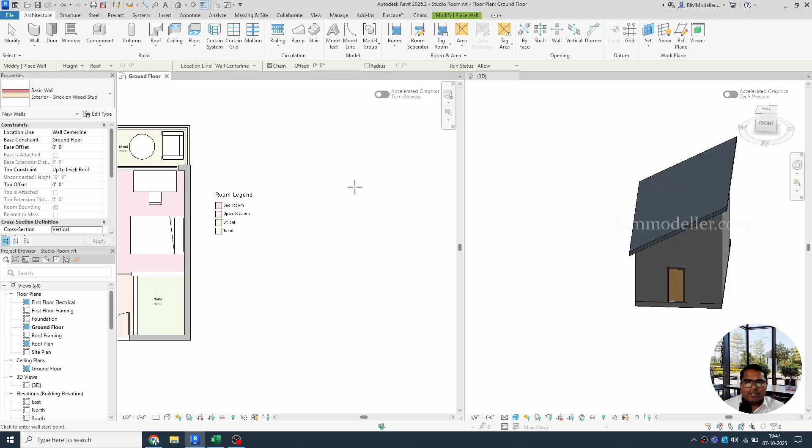So if you're a beginner, if you're using a new version, you must try these options. I'm using Revit 2026, and taking a wall tool, I have taken an exterior basic wall. Everybody knows we can draw this wall, and we can change this to fine and see the wall detail much more in detail.

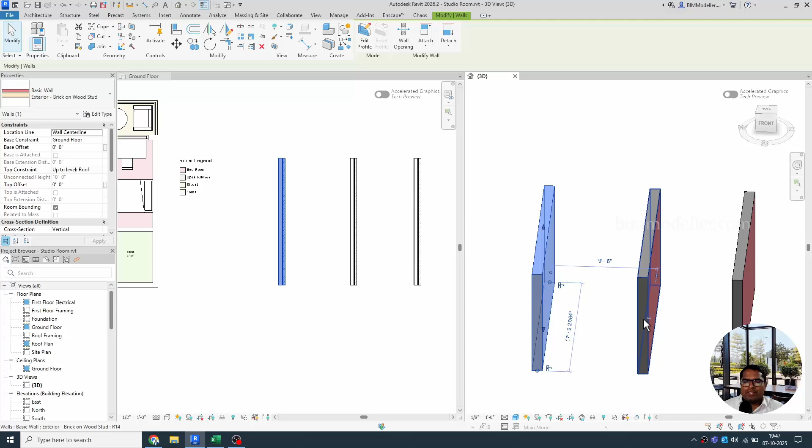So I can copy this multiple times and see what are the three options we have. By default, when you are drawing these, you can see that it's a straight vertical wall. There is a property introduced, cross section, what cross section you needed. It is vertical. The next one I'm going to change is slanted.

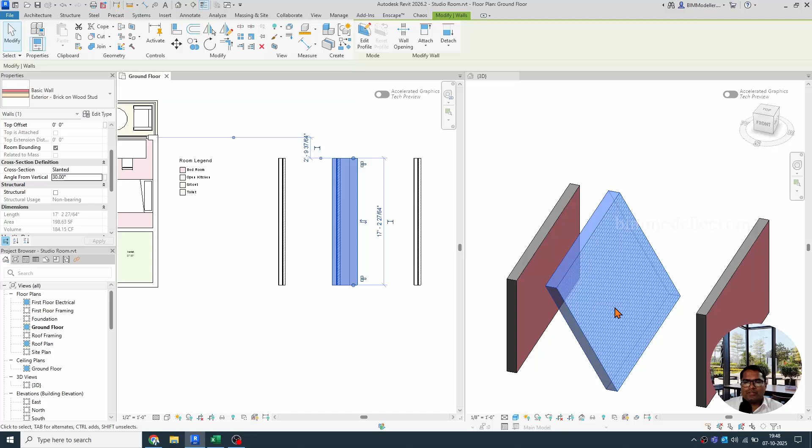You can see that nothing changed, but the property is introduced. We can change the slope property, which is 30 degree, and you can see that the wall is automatically slanted into 30 degree. You can create similar options, right click, create similar, and draw the walls that you needed, any shape that you wanted, and automatically it will be in that shape.

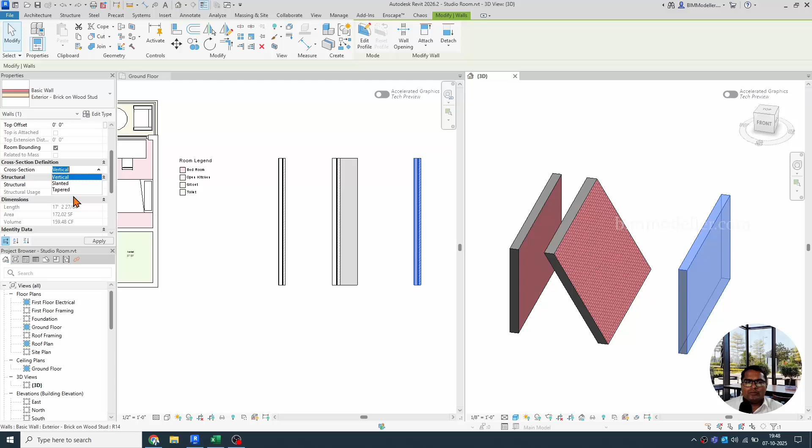Coming back here, when you have another wall, you can have another option which is very interesting, tapered. You can see this error which says the wall type is not compatible because it is not defined in their type. We can duplicate and do it, or go to the edit type of the wall type that we have, and you can see cross section I have already enabled to see what is happening in this place.

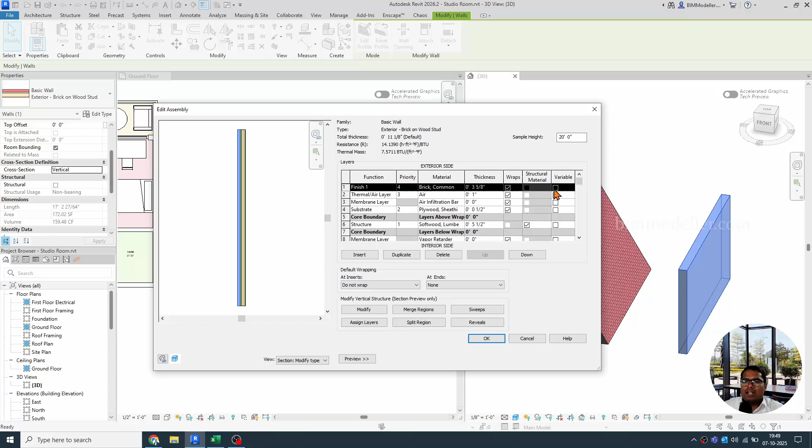The thing we have to do is pick which side, or which layer, will change based on the changes we are making. Is it finish side, or construction, or concrete, or core structural change? You have to pick those options, which leads to material changes when we are applying. Also remember whether it is interior or exterior side.

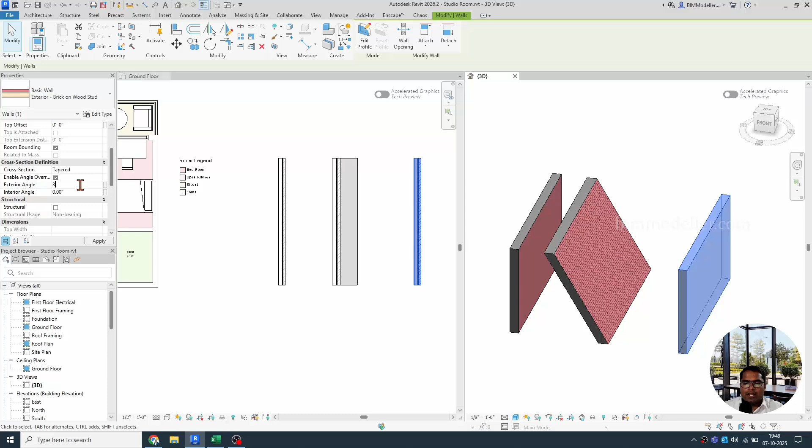I'm making it tapered, and enable the angle overrides, and I can change the value as 30. This is how you'll be able to change the angle. Again, you can create similar, and go ahead and create the shapes that you needed, and the walls will be with the sloped value like these, and you will be able to create the shapes that you needed.

I hope you understand what are the three options available. It was not there in the previous versions, in 2021 it's there, and before that 2020, if you are using those versions it won't be there. These are the new options available with the recent versions, much more needed for the complicated shapes we do in these common days. We used different tricks to accomplish this, but now this option is very much useful by default.